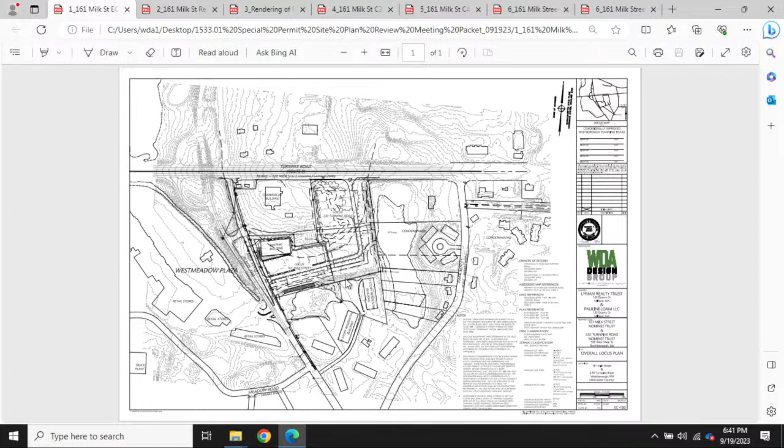That building will be, there it is on the top left-hand corner in a sand color. That will be proposed to turn into individual self-storage units of varying sizes that can be accessed by the proponents once rented and so forth.

On the existing portion of the property, what you're looking at there on the right-hand side is a new building that he proposes to put in, replacing existing pavement, another 20,000 square foot building. Its initial plan will be a 10,000 square foot storage area for his business.

And then over to the left-hand side, where you see us with a dash in the middle right there, that'll become a two-story, 5,000 square foot each story, general offices and general business for his business only, where he'll have offices for staff and some training rooms and so forth necessary for his business. There will be a loading dock in the front for access for various equipment and materials that he'll need.

The parking, as you see, is generally out there existing now. It'll be rehabilitated. It's pretty well beaten up, time has gotten the better use of it. This particular property, a little history to it, was initially developed in the late 70s, 80s I believe, and was active as a roller rink with a fully paved parking lot. Since then, it has been let to go. Other vehicles have been stored there for various car dealerships up and down the highway. And I understand at one time it was also used as a flea market area.

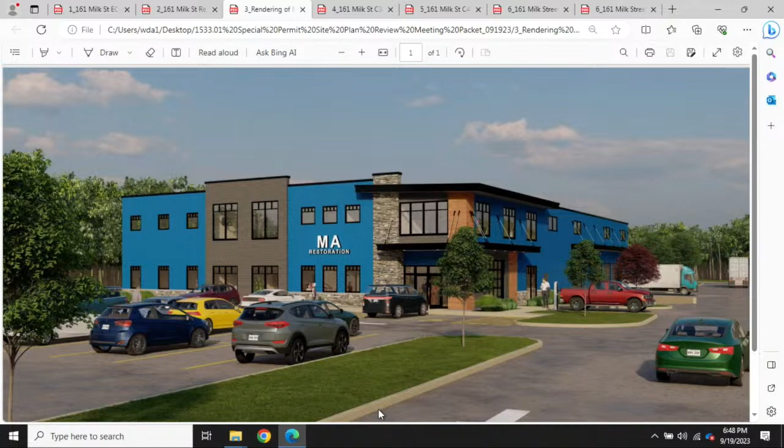Left. That's a quick rendering of what the new building is trending toward, shall we say. And off to...

For the record, Kirsten Braun, traffic engineer with Chappell Engineering Associates. First off, I'll talk a little bit about the site access points. Given the nature of Milk Street, I'll call it the Milk Street ramps - that's what it's referred to in the study because it does get a little confusing that Milk Street sort of forks. So I don't want to call them the same thing, so the driveway will be on the Milk Street ramps, and similarly opposite Route 9, I'll also consider that the Milk Street ramp, just so we don't get confused with which part of Milk Street we're talking about.

So we do propose 2 site driveways here. There's one on Route 9 and one on the Milk Street ramp. The nature of the roadways at both locations is they operate one way, so the driveways will be restricted to right-in, right-out only. We did take a look at sight lines just to go over where the driveways are.

Specifically on Route 9, we're moving that driveway due to the fact that the speeds are high there, and the existing curb cut location - sight lines are now severely restricted by the crest in the roadway just west of the site. So we are proposing to relocate that driveway about 75 feet east. What that does is it helps us meet the minimum sight distance requirements based on the actual speed data that we had collected out there on Route 9.

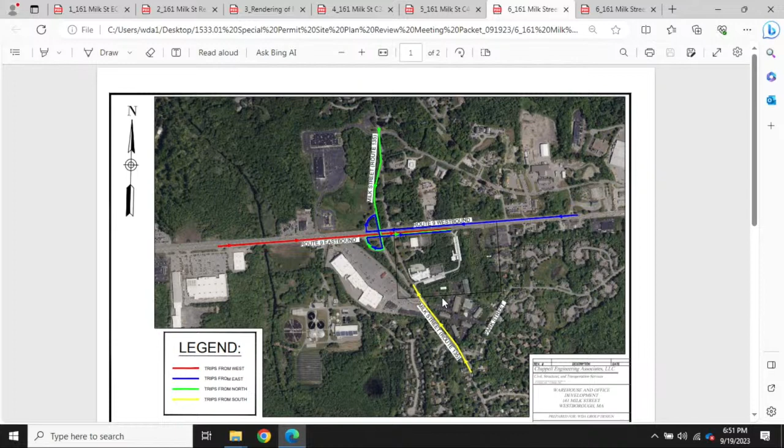We did specifically do sightline profiles, and what that does is it looks vertically at the existing grade of Route 9 and where our driveway is, to make sure we have a clear line of sight to meet the minimum requirements needed for safe operation out there.

Again, they're both Mass DOT owned, so we'll have to go through the whole highway access permit process with the DOT. They'll be reviewing this information as well.

Just a quick note, I know this area is a little confusing. There are a lot of turn restrictions and one-way streets, so I thought it would be helpful to put up a graphic showing how people access the site from different directions. The next graphic shows how people would exit the site and head back in those same directions.

This is exiting the site. You can see going both north and back to the west, you would exit via the Milk Street ramp driveway. You would take that little connector road on the left, and then either continue straight up Milk Street, or turn right onto the northernmost Milk Street ramp to hop onto Route 9 westbound.

Traveling south to get back south from the site, you would exit the Route 9 eastbound driveway. We show Park Street here, but it really depends on the final destination of where somebody's heading south of the site. You could continue on Route 9 and head over towards Lyman Street as well. I think it just depends on where people are going.

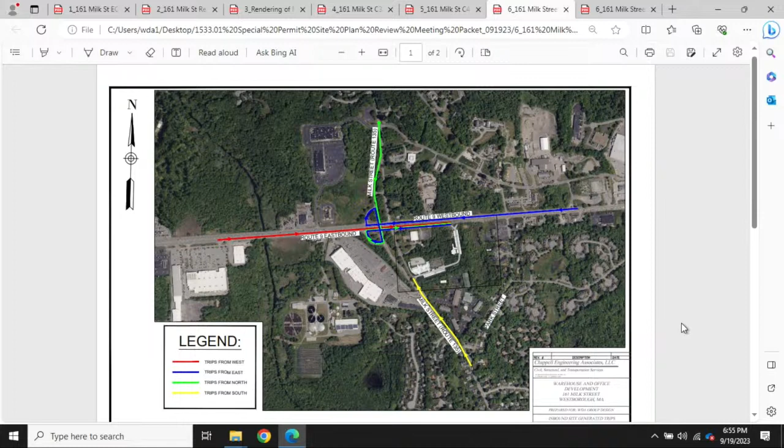We did collect all of our counts back in June of 2023. June is actually a seasonally higher than average month, so we didn't need to adjust seasonally. Mass DOT actually did submit new requirements, I believe last year, that any data collected after March of 2022 doesn't need to be adjusted for COVID unless you're in an area that's predominantly office, which is not this location. So they weren't adjusted for COVID.

We did estimate trips to be generated by the site using the total site size I mentioned before, both 161 Milk Street and 220 Turnpike Road. Based on this data, the development as a whole will generate between 86 and 92 trips during peak hours, just one hour in the morning and one in the evening. These include third building potential on site, as well as the additional expansion space on building 2, the office storage space. I want to note that these estimates are likely conservative, since we know MA Restoration will be occupying the site, and we have an idea how MA Restoration operates. It's my understanding a lot of people still work from home, or go directly from home to project sites, and they're not necessarily standard office trips going to and from the office in the morning and leaving in the evening. So if anything, these trip estimates are probably a bit conservative.

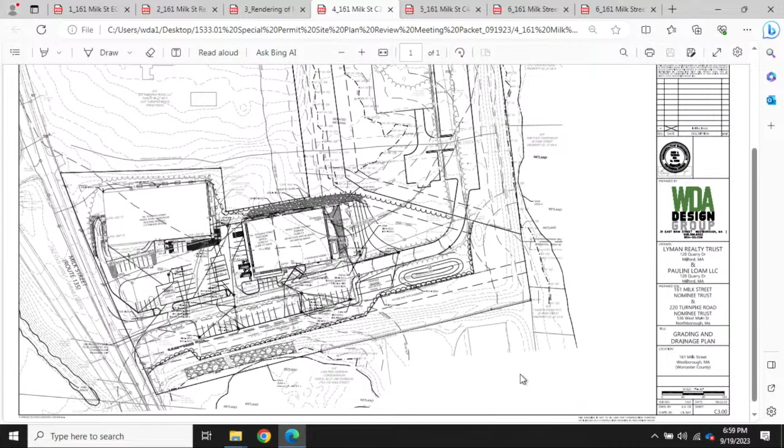Barry? Excellent. Just wanted to touch on the utilities to the site. As I mentioned before, it was going to be developed, so whoever had been in there before has already installed the majority of the utilities, obviously for the existing roller rink, which already has power to it. But there is sewer and gas to the existing building. We will propose to bring gas a little further into the development and then bring it up for 220 if they need it. Electrical will be brought in a little bit further, along with gas, water, and sewer. Sewer currently goes up to the right-hand side of the building, maybe a little bit further. The proponent has done some CCTV inspection of the existing utilities, drainage and gas, and some of the pipes, to make sure their conditions are good. We'll provide that to the town engineer and review those accordingly.

Our intention is to primarily use a lot of the existing drainage as part of our stormwater design. To incorporate that and meet the new stormwater regulations per DEP, we will be collecting roof runoff and infiltrating that directly for recharge. Anything else will be collected in the existing drainage system with some minor modifications to allow for sediment removal prior to being discharged. It's my understanding, through some initial calculations, that the existing system out there was designed for complete build-out of the area, meaning the whole property being paved and buildings being installed, and that would be collected and discharged across Milk Street into an existing drainage swale that eventually runs out to the river. But in our design, we provided a stormwater report. Like I said, we'll do some collection of the roof and provide recharge as required, along with cleaning and detention of the existing stormwater.

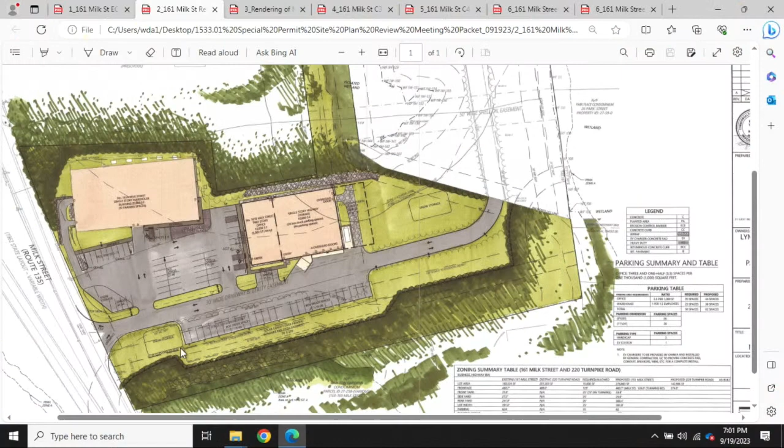Lighting will be up the driveway and on the building to meet the town's no-light-off-the-property requirement. All poles and site lighting will be no more than 20 feet high throughout the property.

Landscape - you want to take that one, Carolyn? Sure, I'll take that one. Yes, so the removal of trees is minimized for the proposed site plan for safety. Hello, my name is Carolyn Burke.

I'm with WDA Design Group, landscape architect. The removal of trees is proposed for the buildings, the safety, and the required infrastructure, and to preserve the wetland buffers. There would be selective removal of dead and dying, diseased and overgrown and invasive vegetation along Milk Street and Turnpike Road to provide views into the property and improve the sight lines.

And vista pruning for the buildings and the pylon sign. The existing vegetation buffer on the south side of the property provides dense screening of the neighboring properties and is to be preserved.

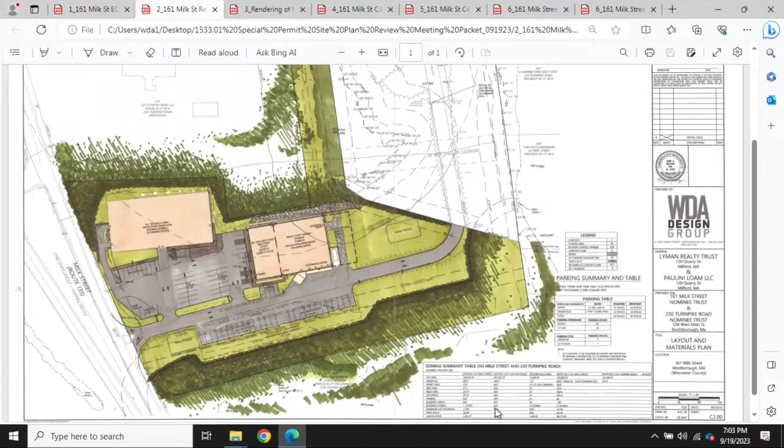Types of trees that have been selected are proposed in the parking area and along the driveway to meet the zoning bylaw for Westborough. The ground layer is standard grass, loam and seed, and conservation mix within the 100-foot setback of the wetland.

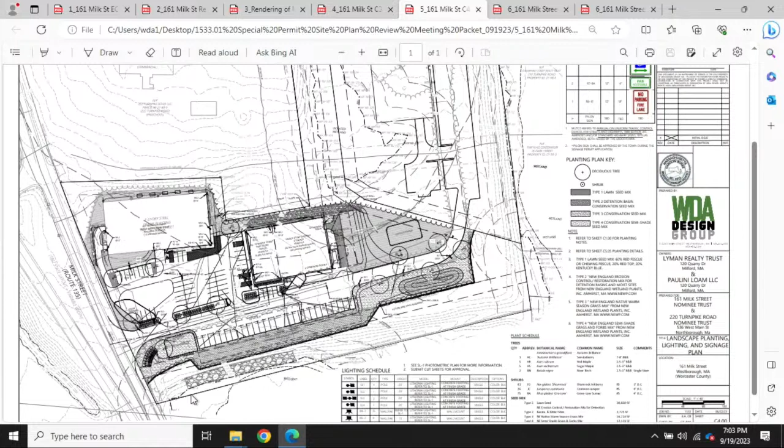I think that's generally a rundown of our proposed project. If you have any questions, we'd be more than welcome to answer them. Do you have any questions? Oh, Peter, why don't you start?

What are the hours of operation for the site? The proposed self-storage facility would be 24/7. The restoration business would be standard working hours.

And then it mentions the visual screening around. Is that different than leaving the trees, or are you actually putting a screening around the location as a buffer? The visual screening I was referring to specifically is the existing buffer along the south side of the property. There's existing vegetation.

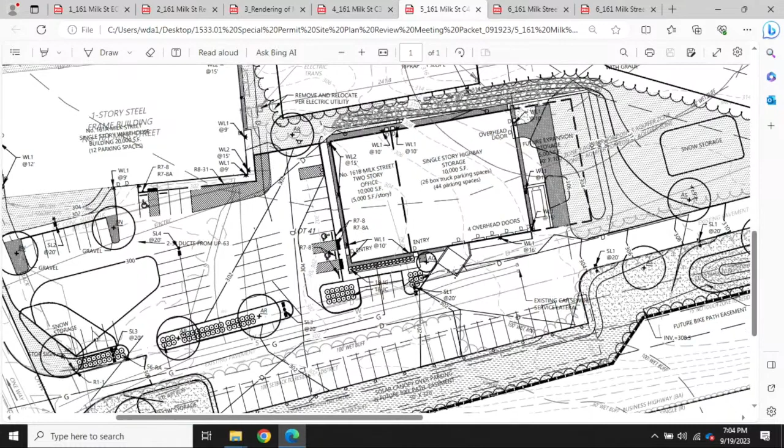Can you point out where you're going to have your snow storage? Certainly, let's go back - so we have this area here at the front. Snow storage on the west side of the parking lot, in this zone.

And then you also mentioned the canopy - where's that canopy located? The canopy is a solar canopy. It is over the proposed parking area.

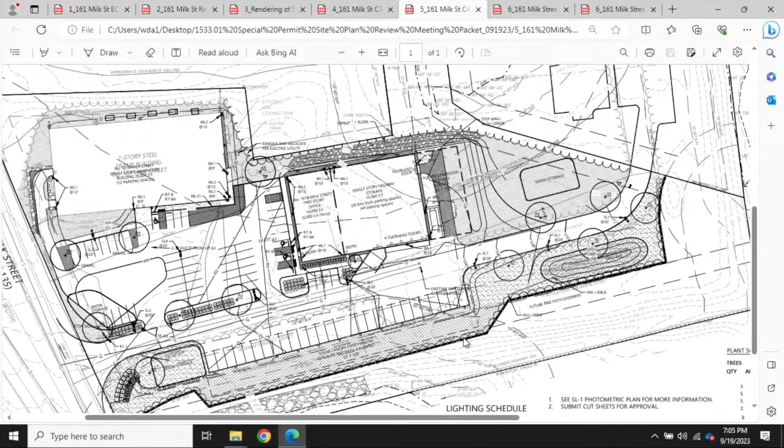John? No questions? I had a few, mainly to do with the driveway. My question is, I know you're only developing half the property, but will people using the developed part be able to go out to Route 9 along the driveway?

Yes. So are you planning to redo that driveway so that it's drivable? Yes. In other words, you're going to renovate or re-asphalt and redo that driveway so people can use it coming in or out as a regular driveway? Yes.

There will be lighting in that corner, the lower corner. And we can install signage to direct people coming in on Route 9 to go straight ahead to the corner if they need to access any of the buildings from that direction.

On the driveway itself, are you planning to put any lighting poles? Not under this project, but we will as it extends - I don't think the future phase is too far behind us. So there'll be no lighting on the driveway itself coming into the project from Route 9? No, not under this, but it will be continued when we develop that phase.

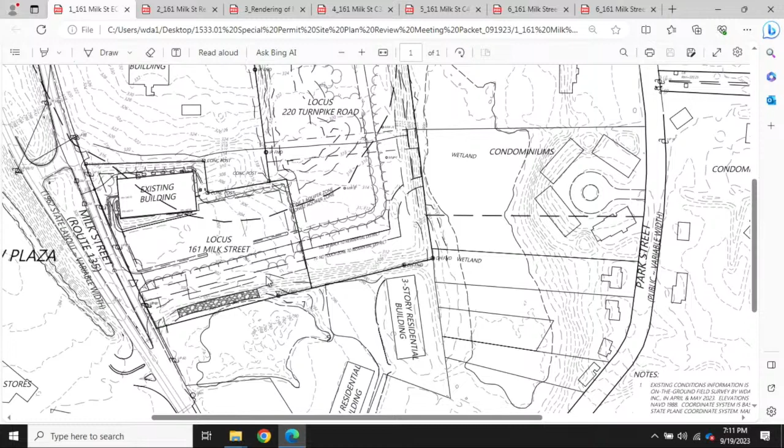And is that the only part of the pavement you're removing, or are you removing existing pavement on the site that's not going to be building or proposed parking? Slivers here and there, adding a little bit here and there - but how many square feet are you going to be removing of pavement? Currently the site is about 63% impermeable. Okay, so we're going from 63 down to what is required now, 40%. Okay, so that's significant.

Solar - just want to get this on the record. Are you proposing solar? Yes, roughly a solar canopy. And rooftop on the buildings? Not at the moment. Okay. I think we would like to see solar on roofs that can support solar, if possible.

Is there any proposed rendering for screening so you can have perspectives from off-site looking into the site to show what that screening is going to look like? Or is the proposed screening as it currently exists? I know you're proposing to cut some trees and vegetation, but is it going to be essentially what's out there now in terms of visual screening, or is there going to be more visibility through the screening once things are cut?

It will be essentially what you see now, with the exception of the front entrance. Some of those larger pines as you enter the site and look at the roller rink will probably come down, since they're old, very large pines that aren't really doing much for screening. For safety's sake, some need to come down, and some are dead. We'll clean that up and put some additional shrubbery in to screen.

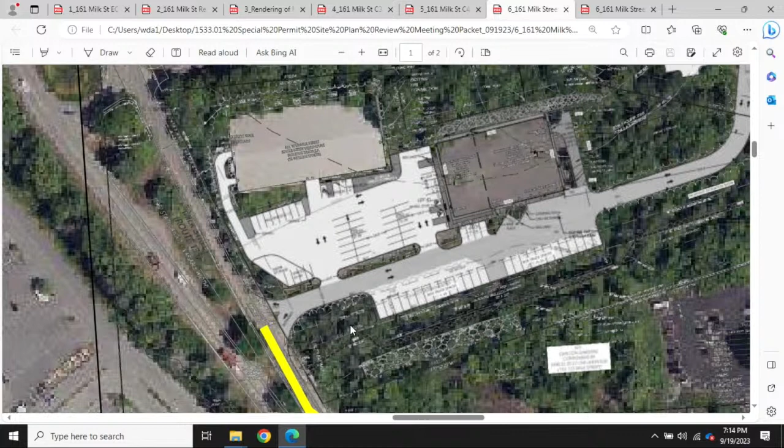As far as the southern edge, since we're removing pavement there, the proposal now is from the southern edge of the existing parking south is the BVW, so we've got a 25-foot limit that we can't do there. Then you're into the existing shrubbery that we will trim back, but we're not planning to put any additional screening. So you're really going to leave that screening as is, just with trimming? And the same thing would happen on the right-hand side, going up through 221, 220.

The dark green shown on this rendering is existing vegetation, so it is dense vegetation. And that's going to remain? Got it, okay, thank you. That's all I have.

Normally we ask for questions from departments. I don't see any departments here at the moment. I know we have some written ones; if anybody wishes to look at them, they'll be available at the town and our office. I will open this hearing to public comment. I would only ask that people keep their remarks to 5 minutes or less. Any questions you wish to ask would go through me to the applicant. So is there anybody in the audience who would like to comment on this? If so, please come up to the mic, introduce yourself, and then ask the question.

Yes, sir. Hi, Terry Barton, 12 Park Street. Can you bring up the map that shows Park Street and the houses? Yeah, that one. So right where your arrow just was, on the wetland area, that area floods. It has a bad drainage problem. Every time we get a heavy rain, that wetlands backs right up to my basement. We have pictures of me canoeing in my backyard right up to my foundation.

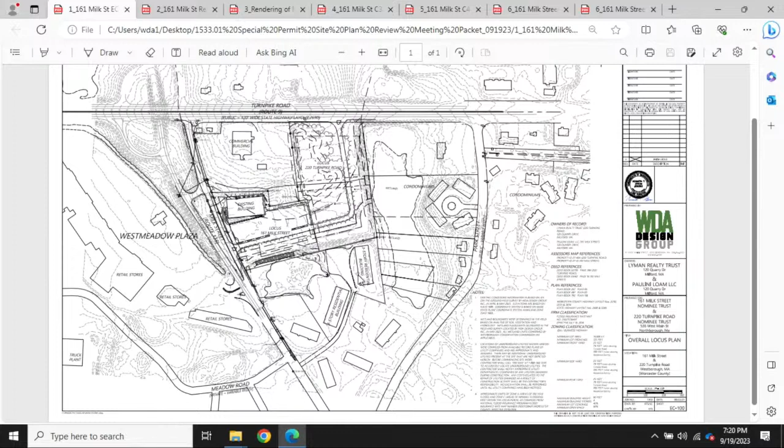Excuse me, if you could just point out on the map where her building is - can we figure out exactly where that is? I know where the wetlands is, I wanted to know where her building is. She said she lived next to it. Can I? Great, thank you. How do you turn it on? It was on, but... no battery? There it goes. Oh, okay.

The topography, as he indicated, is quite steep, and the water just runs into our property on Carlton Gardens. Assuming the property line is correct, and we are going to be surveying our property, it goes from here to here. So that's the immediate border that we need protection from, big time, from the town. The water just runs down, and we have some conservation land here that needs to be protected and studied.

So is this the whole Carlton Gardens you're talking about? The whole, that property boundary. But I mean, you're here as a resident of Carlton Gardens? An owner, yeah, owner. Thank you.

That line border there, from the presentation, I see a lot of contradiction between having the vegetation preserved, which should be preserved, and perhaps more vegetation should be made, and putting solar panels on the same space. They're incongruent. You don't put trees in front of solar panels facing south.

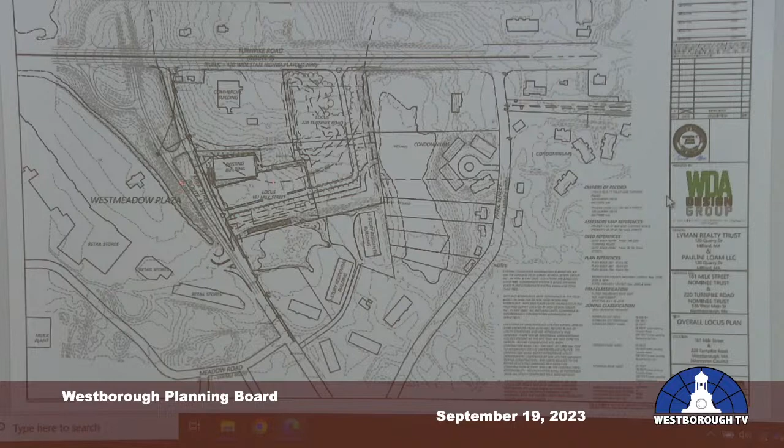So I think that's an issue that needs to be looked at very carefully. The other issue is that they indicated the snow bank storage will be here. From the topography, all the snow is going to run downhill to our property, and that should not be permitted. I think proper piping and removing the water away towards the road or into the system, but not into our property, that's a must. This snowbank area is totally inadequate. The small areas they show where the snow will be stored don't add up for the size of the lot and the size of the parking lot.

So I am urging the board and the Conservation Commission, DPW, and the Department of Engineering to please analyze all this water runoff that would occur if it's not properly reviewed, and it will come to our basements here. We have two buildings here with ground floor units, so half of the unit is underneath ground, and half is above ground. We have serious issues with rainwater right now and water infiltrating from the ground. So I'm appealing to the board to please examine that very, very carefully, and the departments again - engineering, DPW, Conservation Commission - are a must.

This road here - again, I think Conservation needs to look at this border very carefully, because ultimately all this water going downhill impacts our building here. This is 147 Milk Street, 153, 155, 147, 151 - this building is very vulnerable from all this water that comes here as well. So this border needs to be piped to remove all the water from the site, as well as this, so it doesn't go into the conservation areas and the vegetation, the wetlands areas.